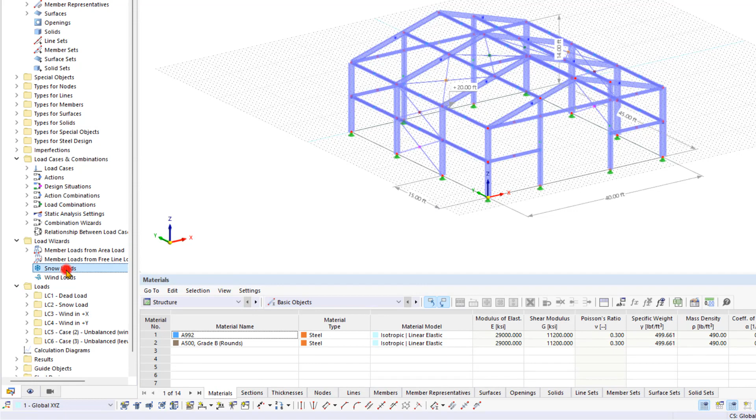In this video, we will explore additional load wizards that you can use to generate snow and wind loads. Let's begin with snow loads and open the respective load wizard from the Data Navigator by double-clicking here. In the new dialog box, we start by selecting the Duo Pitch Roof type. You can enter the roof corner nodes manually in the field below, or alternatively, click the respective symbol in the graphic.

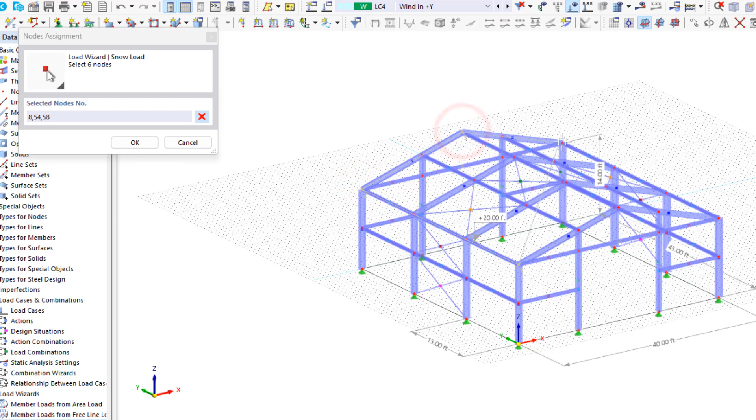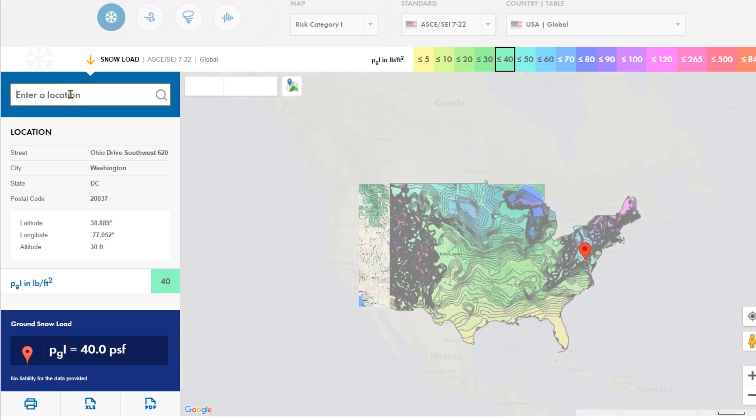A new feature in RFEM 6 allows you to exclude individual roof surfaces from the loading in this dialog box. In the Parameters tab, this is where we can enter the model parameters such as the location, load zone, and so on. With this button, we can enter this location automatically by entering an address in our GeoZone tool. These parameters can also be changed later using the same button.

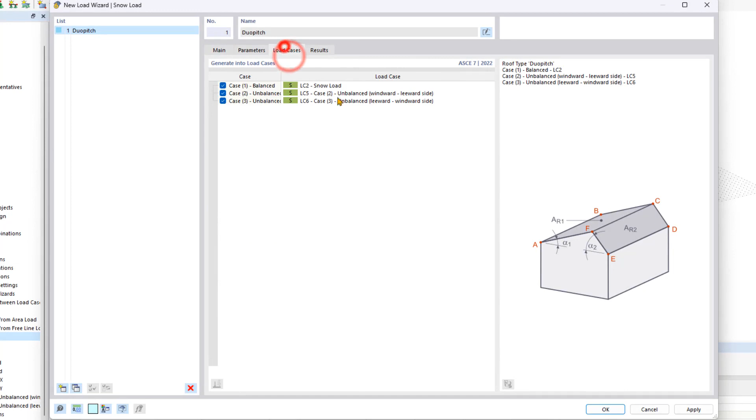The next tab shows the number of load cases required for this wizard. This tab includes all load cases that have already been created and assigned to this action category. In this case, it's the snow load case that we created before, and by clicking the button in the lower left-hand corner, RFEM can generate the remaining load cases automatically. You can confirm this entry by clicking OK.

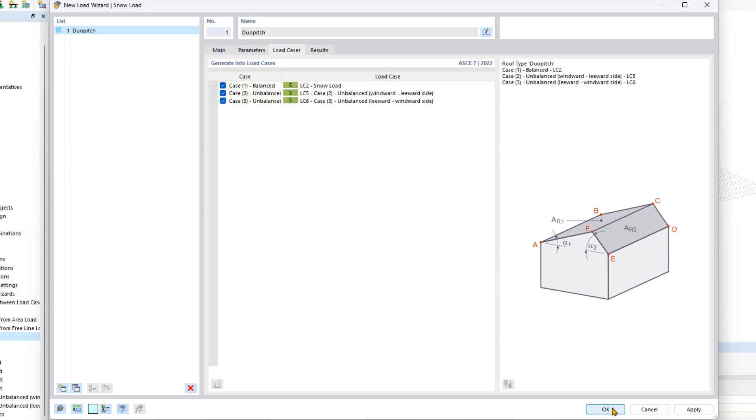And now we can see the generated loads on the roof of the steel hall. The automatically generated load cases can be found in the list above. Now let's apply the same principle to the wind loads. We open the load wizard again, this time for the wind loads. Similarly, we select the Duo Pitch Roof type, and just like with the snow loads, click on the nodes of the roof.

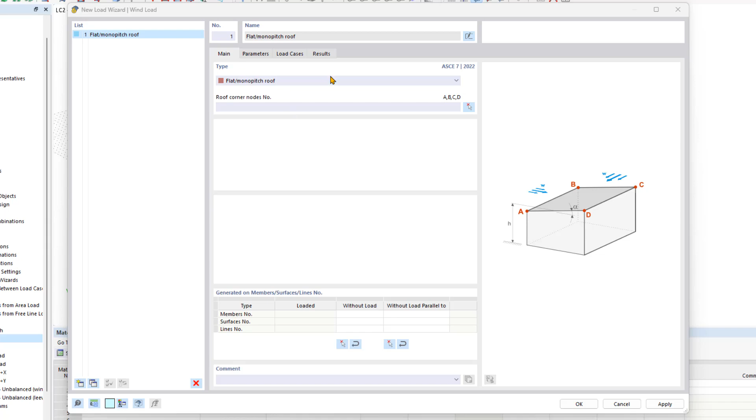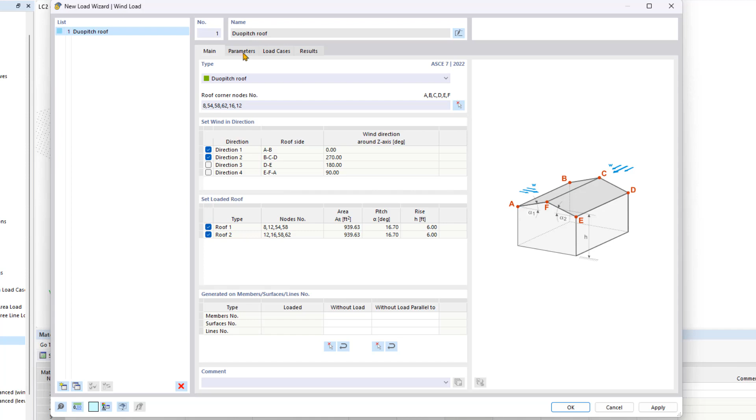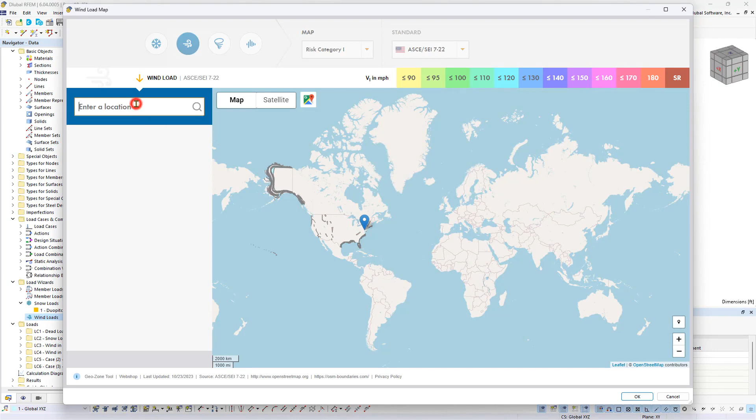To reduce the number of load cases and load combinations, we can deactivate the opposite directions of the wind load in the main tab. The properties of this load case can be found in the Parameters tab. Here we can use the GeoZone tool again to enter the address/location of the building site. Here we also need to specify the structure height. Otherwise, no wind load case can be generated.

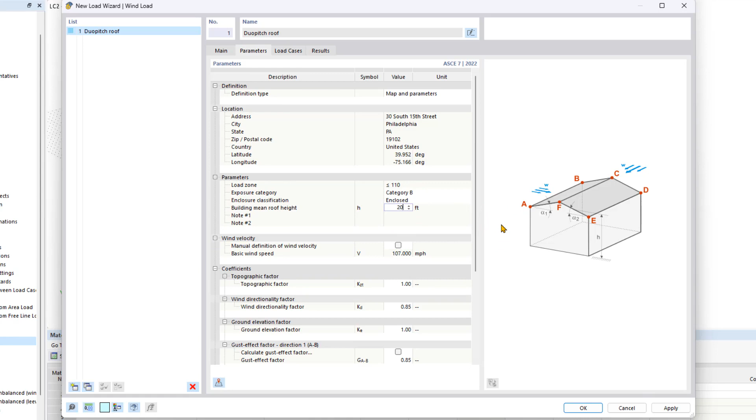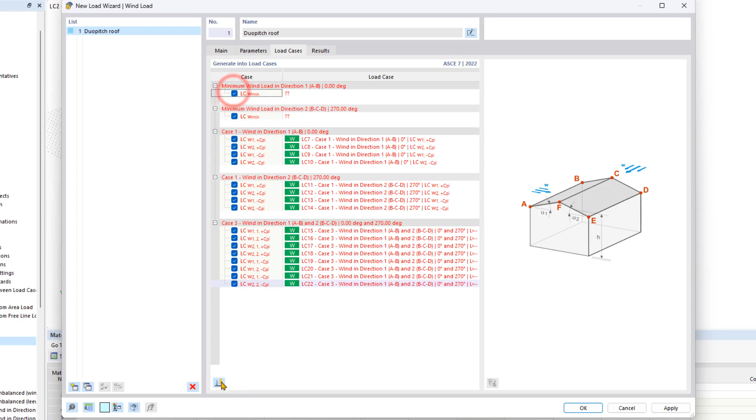In the Load Cases tab, we must create 2 new load cases since the first 2 were automatically recognized by RFEM and inserted here. However, we will use them for the lateral wind load in the next video. We can generate 2 new basic load cases by deactivating and reactivating the first 2. Now, like the snow load wizard, we can generate all load cases with just one click.

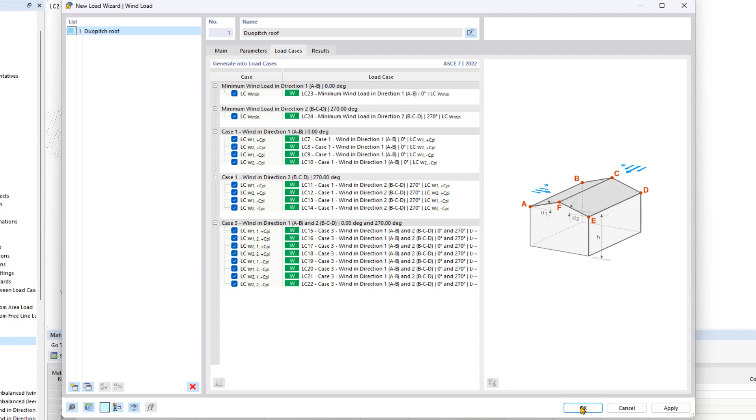If we are satisfied with the properties and parameters that have been entered, we confirm this dialog box, and now we can see the wind loads that have just been created on the structural analysis model. This way, we have easily and conveniently generated snow and wind loads using the load wizard. In the next video, we will dive into the load distribution.